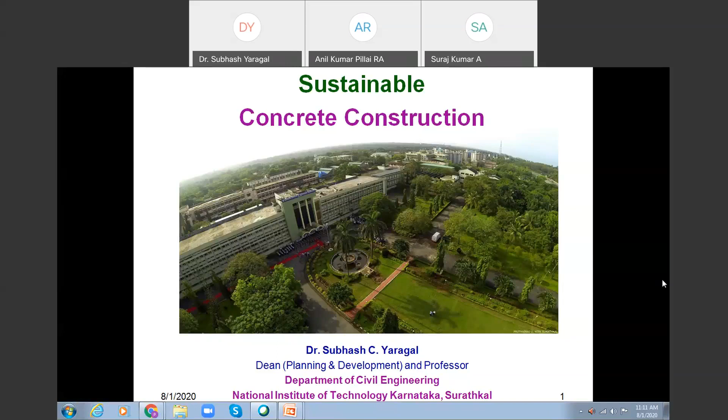There seems to be a problem with bandwidth. You can switch off your video if bandwidth is an issue. You can continue, Dr. Subhash Yaragal, sir. Can you hear us? Anil, sir, are you able to hear him? No, I'm not able to hear. Dr. Subhash Yaragal, sir, we are not able to hear you. Are you able to hear us? Yeah, now it's okay. The audio is muted. Okay, I have unmuted now. Is it fine? Yeah, now it's okay, sir. Okay, thank you so much.

We'll just get started with the most fascinating construction material all of us know today, and it has been exploited to its full extent, and that is concrete.

Let's go through why concrete has been so popular and advantageous to all of us. It is because of its high compressive strength, which is to its advantage. Concrete can be cast to any shape or size that the architect can dream of. It is the only material which can take the shape of the formwork, whatever we envisage or wish to have. Concrete also has the unique distinction that we can manufacture it on site, therefore it is going to be economical.

The invention of pre-stressing by Freyssinet dictated the need for producing high-strength concrete. Concrete, being a composite material with steel, has unlimited structural applications which we have been using all through. There is also the importance of lightweight concrete — today we can design and use lightweight concrete, which has a dual advantage: reduced density coupled with superior properties of thermal insulation.

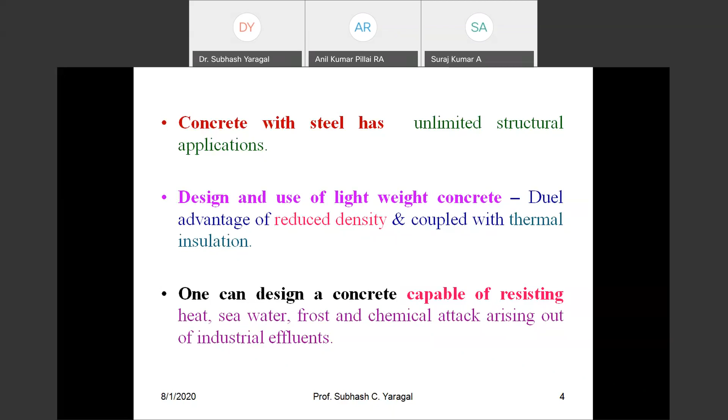To generalize, today we are in a position to design concrete capable of resisting heat, resisting seawater chemicals, resisting frost, and any chemical attack arising out of industrial effluents. As far as the demands of the nuclear age, we have used concrete for radiation shielding in nuclear reactors, and also in hospitals to contain nuclear fuel used for medication purposes to treat cancer, etc.

Concrete can also be sprayed onto and filled into fine cracks for repairs by the process of guniting. Today we can pump concrete, and it can be laid in difficult positions — we are all familiar with self-compacting concrete. So concrete is durable, fire resistant, and requires very little maintenance.

Now, this was the old school of thought. I would like to stress that today we cannot take it for granted that concrete requires very little maintenance, because we have been producing concrete with a lot of value-added industrial byproducts. I don't call these industrial byproducts waste products, because today we are using them to the best possible extent. So once we are introducing these industrial byproducts and producing different kinds of concrete, we cannot take it for granted that it is going to be durable. We have to ensure durability by periodic maintenance.

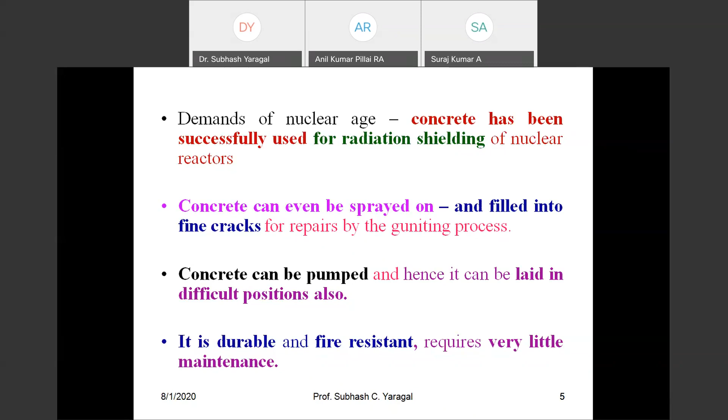Some other general remarks related to sustainability: we know concrete is the most consumed construction material today, only next to water — all of us know this. Undoubtedly, cement is going to be the costliest ingredient of concrete, and cement clinker production consumes a large amount of energy. So it is a very energy-intensive manufacture of cement, and it is also associated with the release of large amounts of carbon dioxide, which has a notable environmental effect.

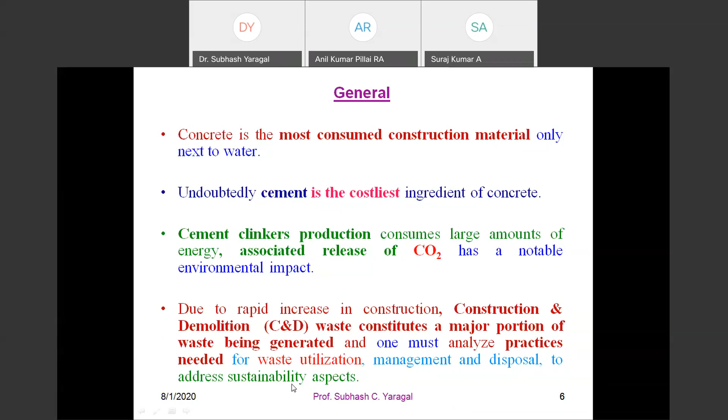We'll discuss about this. Further, due to the rapid increase in construction activities all over the world, the construction and demolition waste, what we call C&D waste, constitutes a major portion of waste that is being generated, and one must analyze practices needed for waste utilization, its management, and also its safe disposal to address the sustainability aspects.

No doubt, development has inflicted severe damage on the environment. We are not going to argue on this, and therefore it definitely is going to endanger its sustainability. So we have to strike a balance between development and sustaining ourselves in the years to come.

The exploitation of natural resources, particularly non-renewable resources for construction, has led to and is leading to millions of tons of construction and demolition waste. So it has been a challenge to handle this C&D waste. On average, every year we produce 15 billion tons of concrete throughout the world, which essentially means 2 tons of concrete per individual per year—not a small amount.

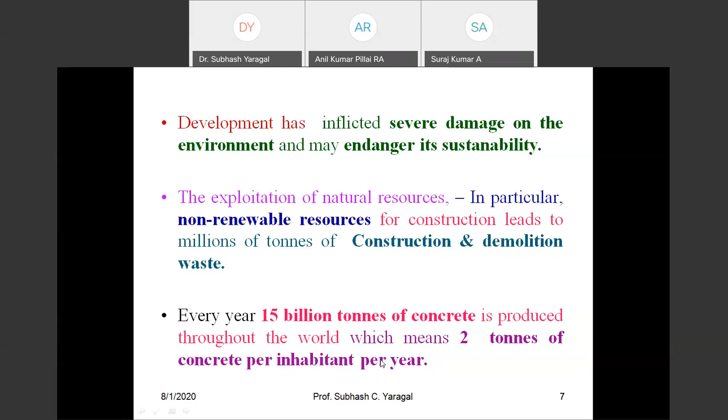The depleting natural resources in the current scenario demand research to examine viable alternative means, modes, and methods for sustainable construction. So any effort toward reduced cement consumption is laudable and a welcome move. We are advocating the use of supplementary cementitious materials, mostly siliceous or aluminous in nature, and this is being exploited with ongoing research.

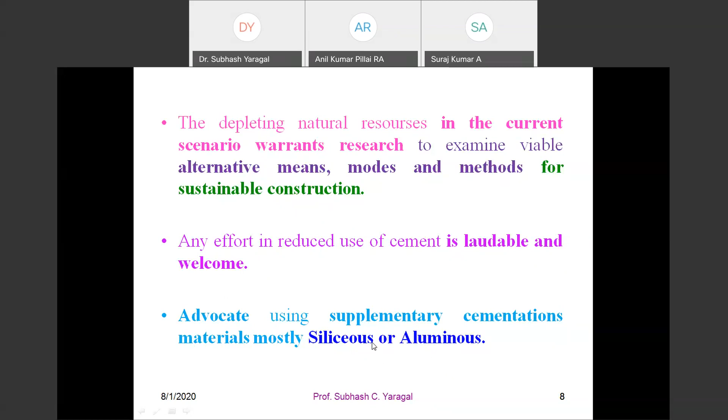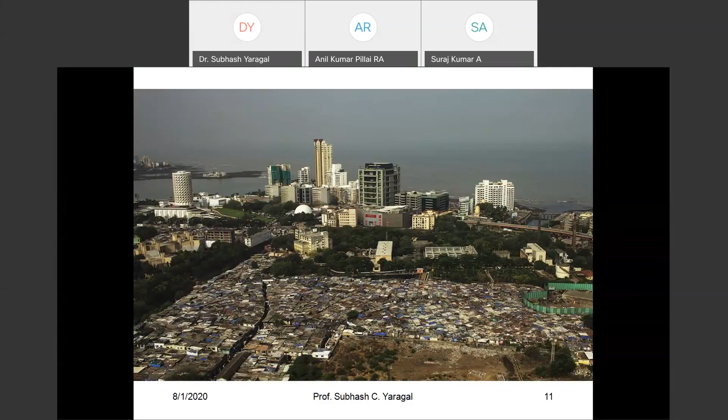Here's one more photograph from the same locality, showing the living conditions in the slum dwelling. You have wastewater simply let off, and a lot of materials that have been disposed of.

This close-up photograph has attracted my attention. This water is used for washing clothes, bathing, and even filtered for cooking and drinking purposes. In the background you can see even the pigs taking the same water. Definitely, this is not a livable condition.

So if you ask what sustainability or sustainable construction and development means, it is very simple. The father of the nation long ago said: live and let live. These two words carry a lot of meaning—you live comfortably, and you must also give room for others to live. That means whatever resources the present generation uses for comfortable living, you must also preserve or keep for future generations so they can live comfortably too. Essentially, sustainability is as simple as that.

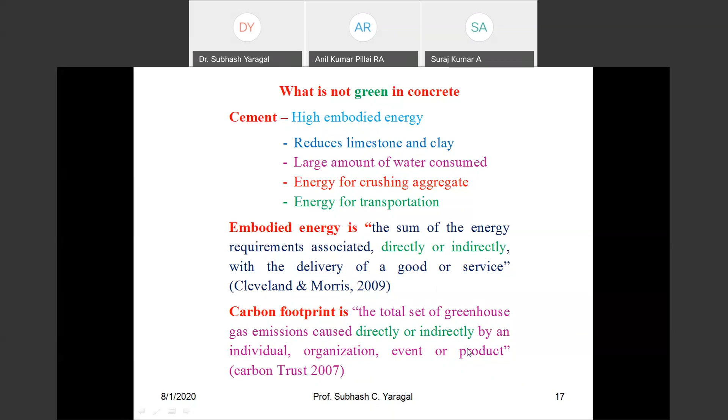Now we come back to issues of durability and look at the deterioration of concrete. If concrete is deteriorating, it has considerable detrimental impact on resources. The faster the deterioration, the sooner you are going to exhaust your available resources, so it is a cause of concern. This deterioration indirectly affects the environment and safety.

As regards to durability, I am talking about two items: the surplus lime and the carbonation. Surplus lime is due to high C3S, which is one of the hydration products of cement, directly associated with high fineness of cement. Today we are producing very fine cement, maybe because of the technology involved.

So more lime is released in the early days of cement hydration, which leads to leaching. That means calcium hydroxide would like to get out of the body of your concrete product. Once it is leached, it makes the body of concrete more porous. If your concrete becomes porous, it is more liable to chemical attacks, as chemicals can enter the body of concrete, threatening the design or life of your concrete.

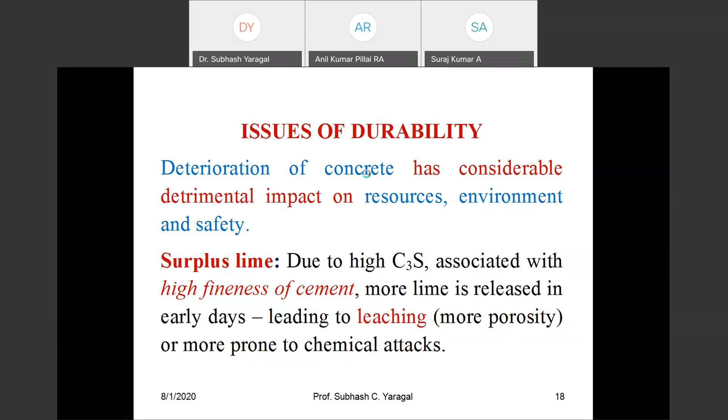Now the next one is heat of hydration. The heat of hydration is supposed to be rendered to the system when the system is in need. But due to fine grinding of cement, more heat is released in the early days of hydration, resulting in micro cracking and thermal shrinkage cracks. This is another important aspect.

Now the other factors are corrosion of reinforcement, carbonation, sulfate attack, and alkali silica reaction in concrete, which are the major issues of durability.

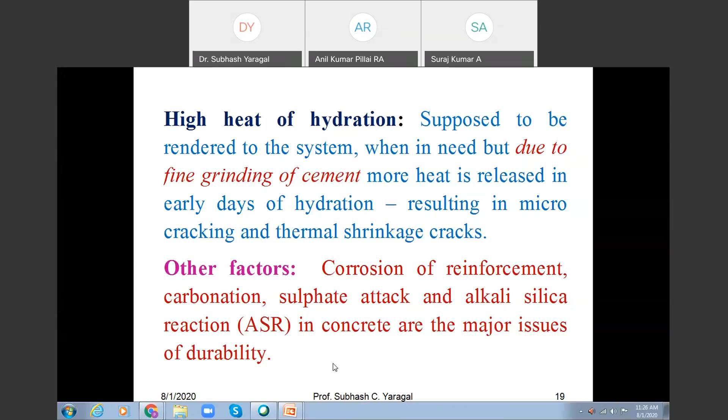Now, what is carbonation? It is the process by which carbon dioxide from the air penetrates into the concrete. It reacts with calcium hydroxide in the presence of water to form calcium carbonate, leading to minor shrinkage. This is one aspect of the problem.

In the presence of moisture, CO2 changes into dilute carbonic acid, which attacks concrete and reduces the pH, which is around 13, an alkaline environment, down to 8.3. So we are making the environment acidic, switching over from alkaline toward the acidic range.

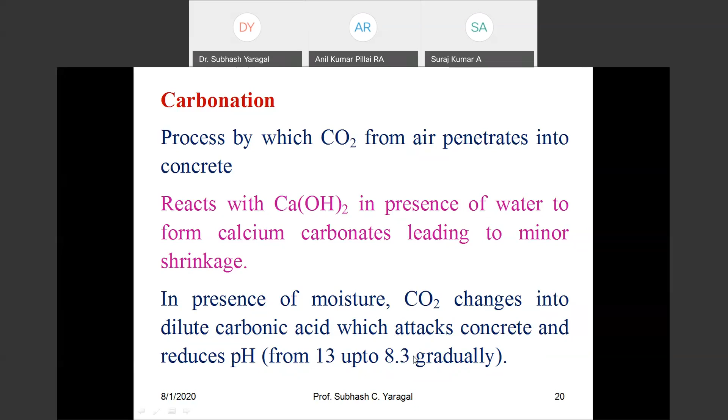Now, this is an advantage for us because a high pH creates a high alkaline passivating layer around the steel reinforcement, extending protection from corrosion. So the more the alkalinity, the more your reinforcement is protected. Now, what happens at a pH of 8.3?

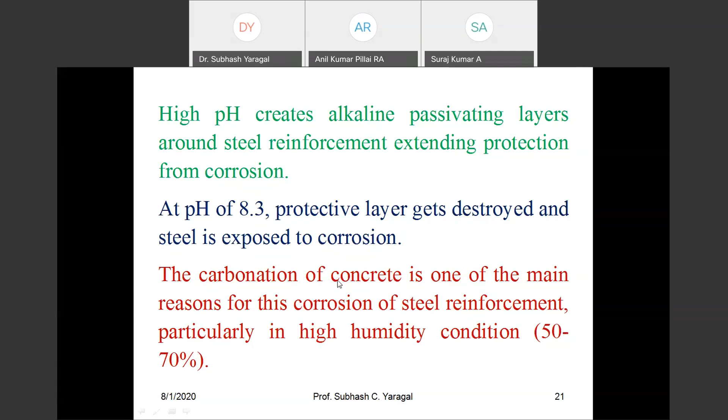The protective layers get destroyed and steel is exposed to corrosion. Carbonation of concrete is one of the major reasons for corrosion of steel reinforcement, particularly in high humidity conditions in coastal regions where humidity can range from 50 to 70%. Places like Mangalore have 90 plus humidity. In such cases, carbonation of concrete is a serious threat for the deterioration of concrete.

So I move to the issues related to this: what are the concerns for all of us, or the civil engineering fraternity, and what are the ways ahead to address this problem of sustainable concrete construction.

So if you ask, are there any global efforts towards sustainability? Definitely yes. The first attempt was in 2007, where we had the Intergovernmental Panel on Climate Change, IPCC. This panel stated that global warming is no longer an issue that has to be debated. That means there is global warming, and it is going to remain. We must have drastic actions for long-term sustainability.

Global warming is definitely due to human activity and is irreversible. IPCC came out with three important findings, and it recommends drastic steps to reduce CO2 emissions, which is the primary source of global warming. Further, it said if no actions are taken to curb or reduce CO2 emissions, it is likely that the Earth's average temperature could increase by 4 degrees C by the end of the century.

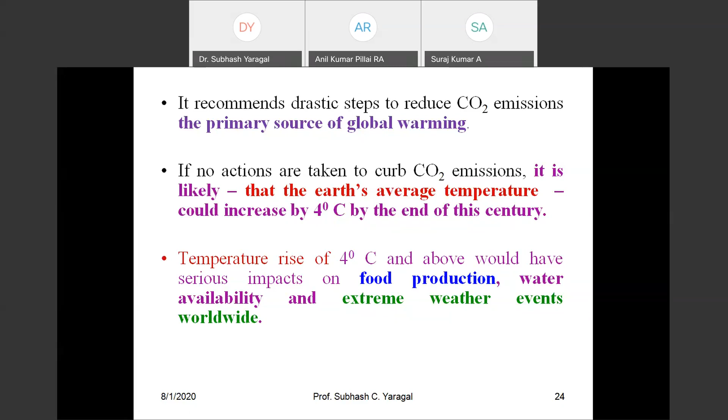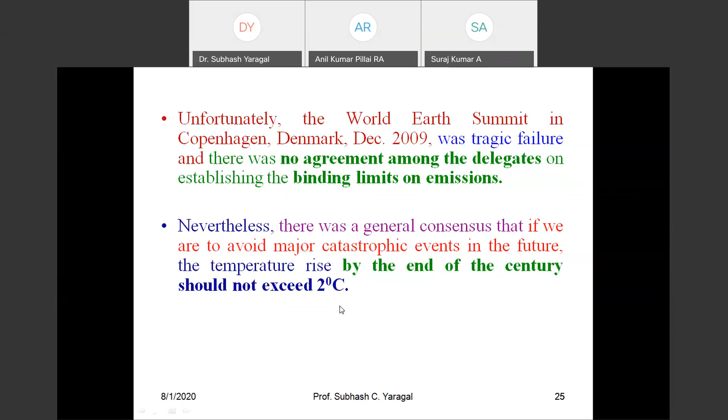The next global effort was the World Earth Summit, held in 2009, which was again a tragic failure because there was no agreement among the delegates on fixing or establishing binding limits on emissions. However, there was a general consensus that if we are to avoid major catastrophic events in the future, the temperature rise by the end of the century should not exceed 2 degrees C. I talked about 4 degrees C in the previous slide, but if we have to be safe, we should restrict the temperature rise to no more than 2 degrees C.

Now, storing this captured carbon dioxide underground probably is going to be a threat to the quality of groundwater, so research is on in this. Then you have seawater and CO2 - research is ongoing to use seawater to react with captured CO2 to develop aggregates and cementitious products.

The third one - there are efforts for converting atmospheric CO2 into commercial grade gasoline. The process involves converting CO2 into cost-efficient energy. Pilot studies are also going on.

The fourth one is actually due to nature - absorption of carbon dioxide that has been emitted, by the oceans all over. They have absorbed nearly half of the CO2 emissions during the past 2 centuries. This has been a blessing for all of us, because whatever carbon dioxide emitted, 50% of that has gone into the oceans. So this has served as a sink.

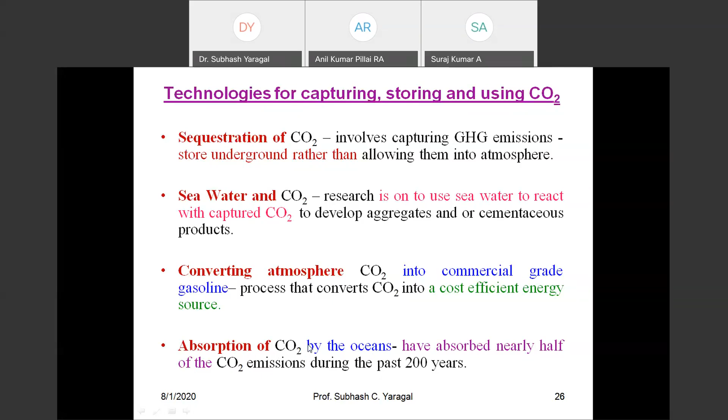Now, tropical deforestation is also a cause of concern - it's supposed to be the second biggest cause for global climate change, only next to burning of fossil fuels. Because of deforestation, Indonesia and Brazil rank 3rd and 4th in the world in greenhouse gas emissions. Of course, the first and second countries are China and USA.

Now, Tibet and global warming. Tibet's altitude is around 4 kilometers above mean sea level, and it is called the barometer of the world's climate, and is very sensitive to temperature changes. So if you look at what is happening in Tibet, you are almost directly correlating it to global warming.

If we see in the past 5 decades, from 1960 to 2010, every decade there has been an increase of 0.3 degrees. So 0.3 times 5 - in only about 50 years, you have a change of 1.5 degrees C. When you compare the temperature in Tibet, it is 6 times higher than other parts observed in China. So it is called the barometer of the world's climate.

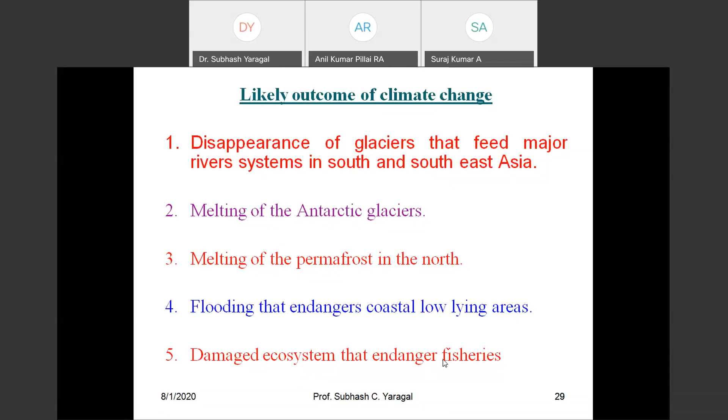You are likely to have danger of very serious air pollution because of global climate change. You may have increased danger of insect-borne diseases, increased threat of forest fires, and very serious floods. Forests turning to grasslands, very fertile land becoming barren land. And you may have extremely serious shortages of water both in Africa and Asia. We are already experiencing this.

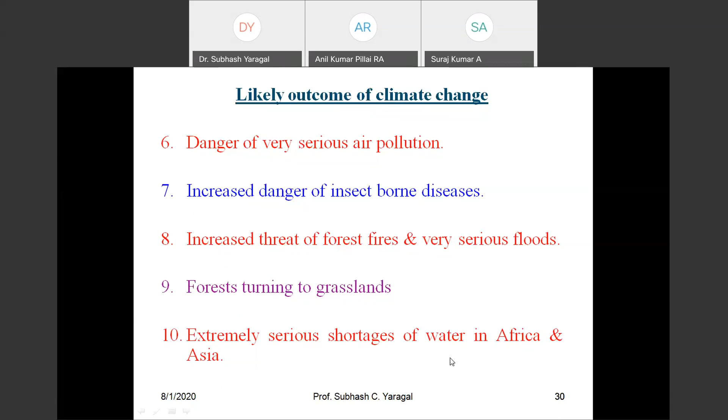So I'm coming back to sustainability. If you look at the production of cement, the carbon dioxide that we are emitting - if you produce 1 ton of cement, approximately 900 kgs or 0.9 ton of CO2 is emitted. Now, when you produce concrete products using cement, we may have absorption of CO2 from the atmosphere during the hardening process. Therefore, minus 0.4 ton, around 400 kgs, goes back into the body of concrete. So effectively, if you are producing 1 ton of cement, you are letting off around 500 kgs of carbon dioxide into the atmosphere.

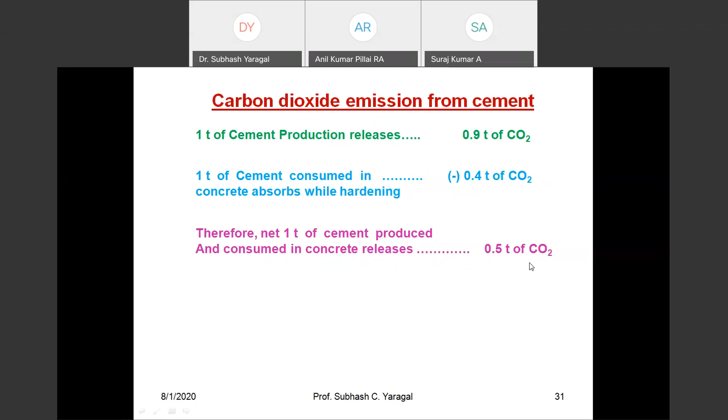So let's look at the greenhouse gases from manufacture of OPC. Mostly we think of carbon dioxide, but greenhouse gas emissions include other things I would like to highlight here. Manufacture of OPC is highly energy intensive and a significant contributor of greenhouse gas emissions - enormous emission of CO2 into the atmosphere, along with minor amounts of oxides of nitrogen and also methane. Now, oxides of nitrogen and methane, however small they are, are much more damaging than carbon dioxide.

Just to give you a feel, I have given you the relative damage indices for various greenhouse gas emissions. If you take the damage of carbon dioxide as 1, methane is 20 times more threatening or more dangerous. Nitrous oxide is 200 times more dangerous, and fluorine is 15,000 times more deadly or dangerous than carbon dioxide.

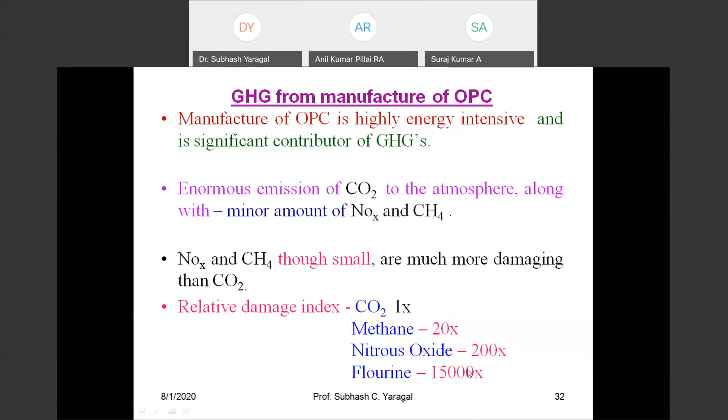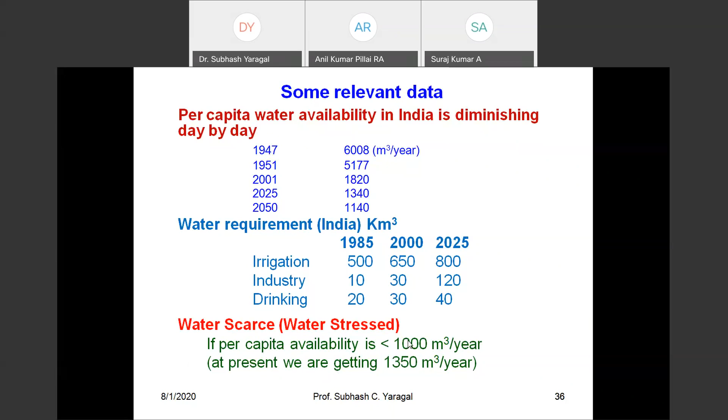So currently we have this availability. Very soon, a lot of areas all over the world will be having water scarcity or they will be water stressed.

So what do we do for sustainable development? Several important issues: loss of storage due to silting. So simply, you do the desilting, you make your reservoirs or places impounding water so that water gets stored, not silt. Address the problem of declining groundwater table. You do the recharge, so that the groundwater table stabilizes, but it is always depleting now.

We need to scientifically address the occurrence of droughts and floods. The degradation of water quality is also happening; this has to be scientifically looked at. Coastal areas have the problem of saltwater intrusion, and it has to be addressed. Waterlogging in low-lying areas has to be addressed. Address the problem of proper drainage, and you have to preserve the soil nutrients by proper drainage.

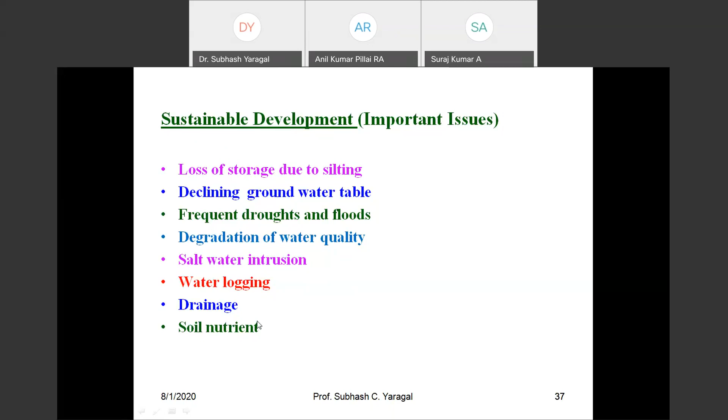Other familiar techniques for preserving water, which is a source, as I say, for production of cement, for making concrete. Therefore, I'm talking about water here.

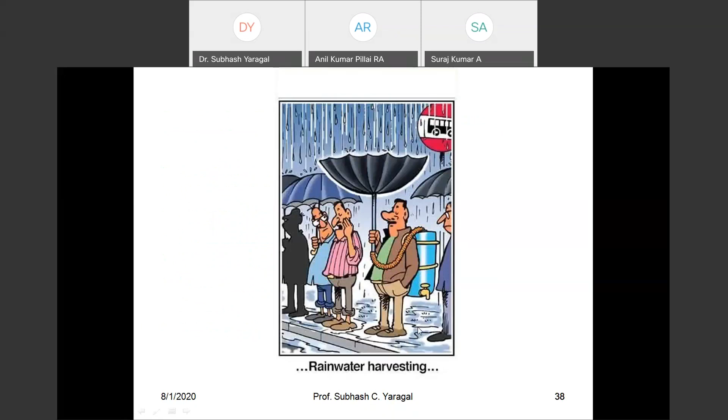So rainwater harvesting is a very simple technique we must preach and practice. You must encourage rooftop rainwater harvesting. I think government has to have a policy now for whatever new construction. So places like Chennai already have policies where every new house construction must have the provision for rainwater harvesting. So we are preserving water as a resource.

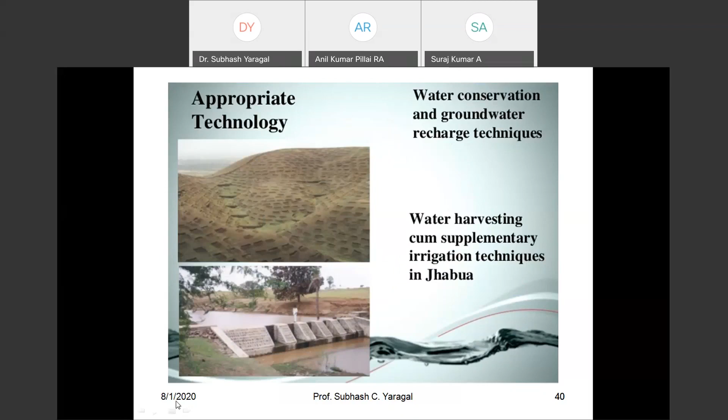We have several other technologies for water conservation and groundwater recharge techniques. They are to be encouraged and practiced. You may have storage devices either above or below ground: storage tanks, water containers, lagoons, infiltration ponds. All of them have to be encouraged.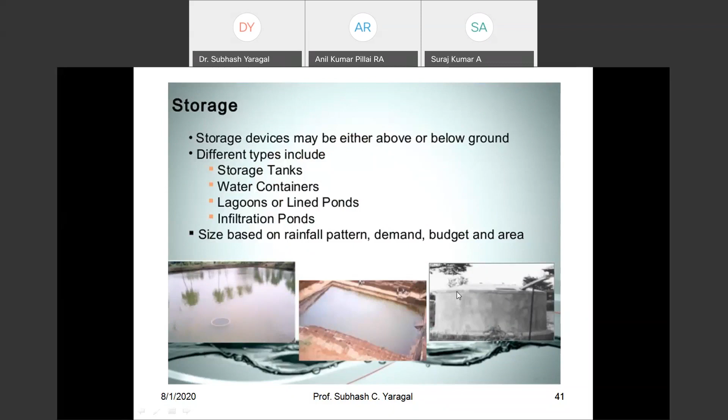And I would like to say water is very precious. We must save it for the future. So there are a lot of quick tips, but I'm not going into the detail in the interest of time for all of us.

Every day there are many simple little things we can do around your house to save water. If we save water, you save money. And if we save water and money, you help the environment. So all of them start and end with you. You are an important stakeholder if water has to be preserved.

So adopt some clever shortcuts to save water. All of us are familiar with a lot of shortcuts. How to have a morning shave? Use a mug of water. How to brush? Don't use your running tap, but use a mug of water. So a lot of such quick tips are available and have to be practiced if water has to be preserved as a very important commodity.

What are remedial measures as far as water is concerned? Conjunctive use of surface water and groundwater. We must have a policy on how much surface water has to be used and how much groundwater has to be pumped. That means you must have an effective draft operation policy. You cannot go on exploiting groundwater available to your whim and fancy. Government should intervene and decide how much groundwater draft is being utilized from time to time.

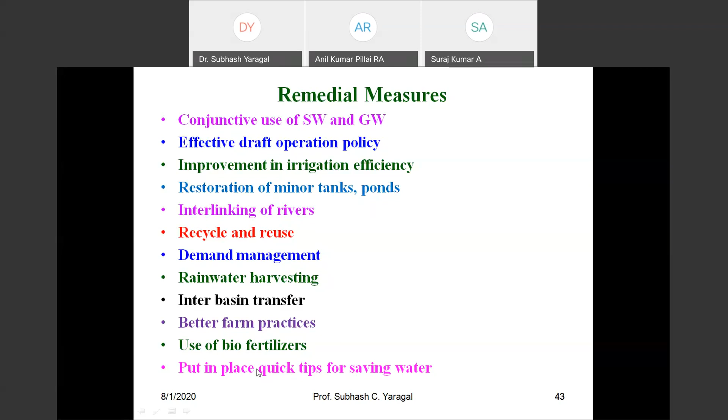So there are now several hotels which supply water only if you demand it; otherwise they do not serve it. If four of you go for a coffee, four glasses of water are not kept on the table. Only if you ask, they serve you water. So it is a very good step for saving water.

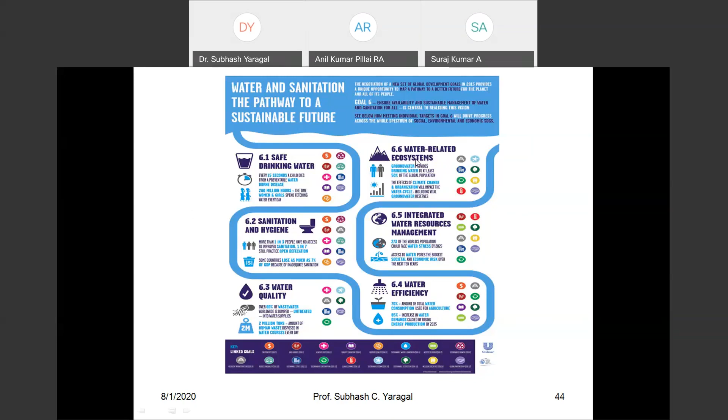I just shared one slide on this. What is the way ahead? I am moving further, and mostly I would like to share the research efforts on in NITK Surathkal, which will be my last part. So what are our ways ahead to address this problem of concrete sustainability?

To our advantage, we have a lot of industrial byproducts. I have given very few examples, but there are so many: waste foundry sand, copper slag, ferrochrome slag. We have ferrochrome ash also, which we have used, palm oil clinker, coconut shell, bottom ash, blast furnace slag, imperial smelting slag, steel slag, and fly ash—both C and F class.

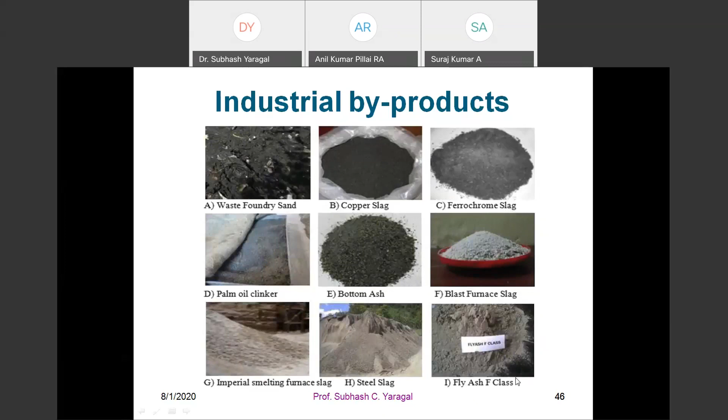So let's see how we can make concrete go greener. We are talking about eco-friendly materials, green concrete, sustainable concrete. So how to make concrete go greener? First, we must reduce the content of OPC per cubic meter of concrete production.

Try to reuse previously used concrete elements if they are good enough—we must not simply throw them as debris, but try to reuse them. Reduce or use water sparingly; take water for making concrete only to the extent really required, treating it as a very important resource. Of course, we have admixtures to supplement or reduce the consumption of water.

So you must recycle—use recycled coarse aggregate and fine aggregate from your construction and demolition waste. I'll be reporting a lot of studies we have done, and you will appreciate the efforts that have gone in at NITK Surathkal on this. If possible, even try to recycle your rebar leftovers. Use the right admixtures, right aggregates, right reinforcement—that means you make a good concrete, and a good concrete is more durable.

So integrate concrete into green building elements. Go for aerated autoclaved concrete in the building.

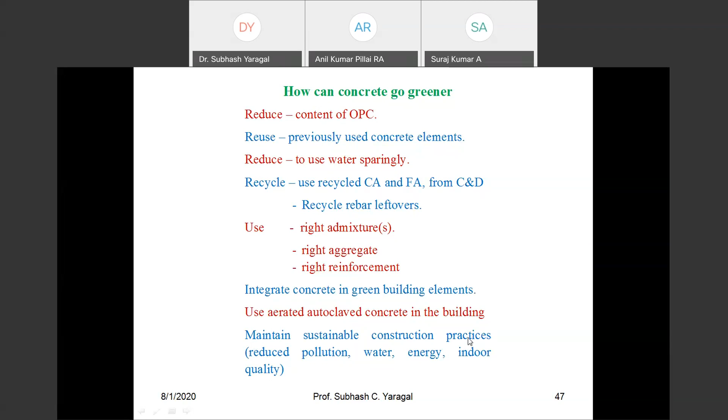We come to, of course, blended cements. Anil Kumar Pillai also talked about blended cements. We have exploited this to the extent possible. So Portland Pozzolana cement is being used extensively, which is a welcome sign because we are using fly ash. Portland slag cement - a lot of slag also we are using. We are producing both PPC and PSC.

Now I'd like to draw your attention to composite cement, which has been recommended by the Bureau of Indian Standards. It is an intimately interground mixture of OPC clinker along with slag and fly ash. You use your limestone or clay clinker to the extent of either the lower or upper limit, so you still preserve around 35% of your deposits. But you use fly ash 15 to 35%, and granulated slag, ground granulated slag, 20 to 50%. So this composite cement, which is a blend of fly ash and GGBS, is supposed to be more durable and is also recommended by the Bureau of Indian Standards.

So all these three are a welcome note for reducing the manufacture of OPC. You have found a substitute to the extent possible, and this has to be encouraged in the years to come.

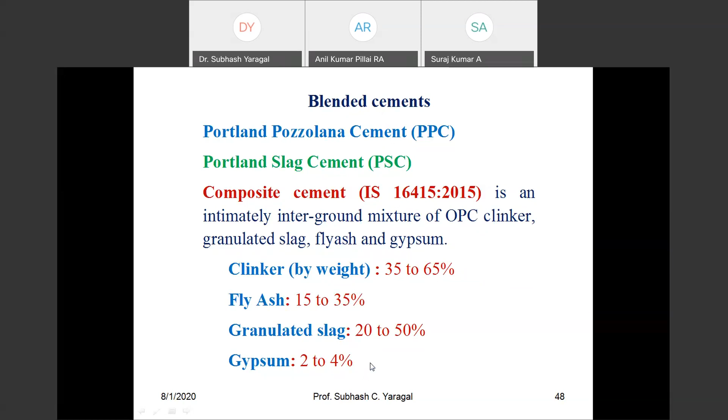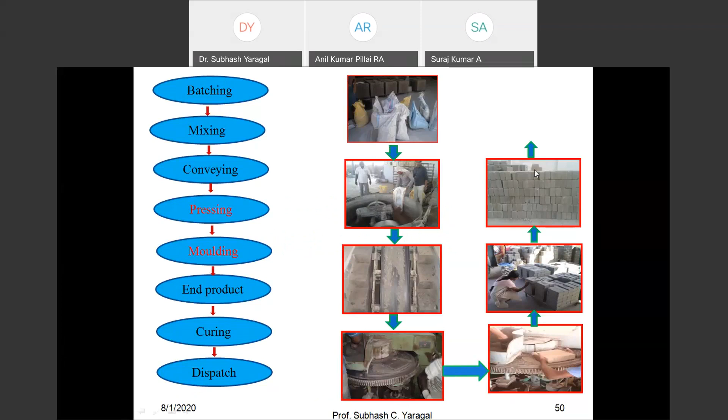So, of course, coal ash bricks have been commercially popularized - that is a welcome note. A lot of people are producing coal ash bricks, and you also have bottom ash, which is used as fine aggregate - also a welcome note. In production of coal ash bricks, you have batching and mixing, then you convey it, do the pressing and molding, get the end product, do the curing, and then dispatch or transport them. We also have concrete products.

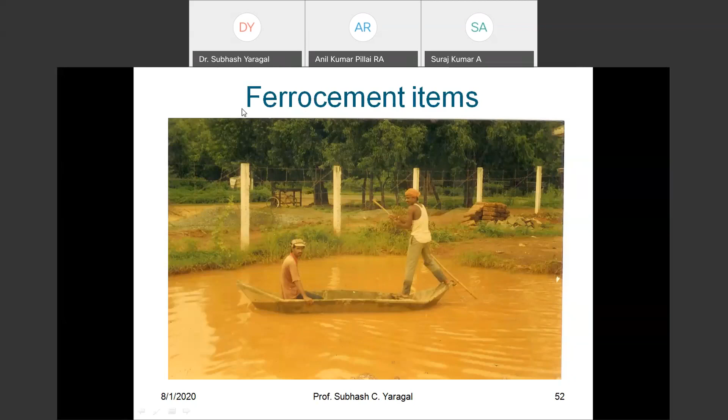So wherever you think there is scope for manufacture of ferrocement items, I think in the years to come, ferrocement products should be exploited. They are underutilized, in my opinion.

So I'm coming to some selected research efforts at NITK Surathkal, which is the last part of my presentation. Please pay attention, those who are already doing research and those who want some takeaway from our research which has happened and which has already been published.

The first work I'm sharing here is the characterization and performance of processed lateritic fine aggregates in cement mortars and concretes. In this study, we have taken the lateritic sand which is available in laterite deposits during the time of dressing of laterite blocks, and we have come out with a systematic way of characterizing this lateritic fine aggregate. We have studied its performance in production of cement mortars and concretes.

If you go for any level of replacement of lateritic fine aggregate as a substitute for river sand, you can do it up to 100% replacement - that is what we are reporting here. For any concrete, you can straight away use the lateritic fine aggregates characterized the way we have done, and you get the same or more strength than you would have got using river sand.

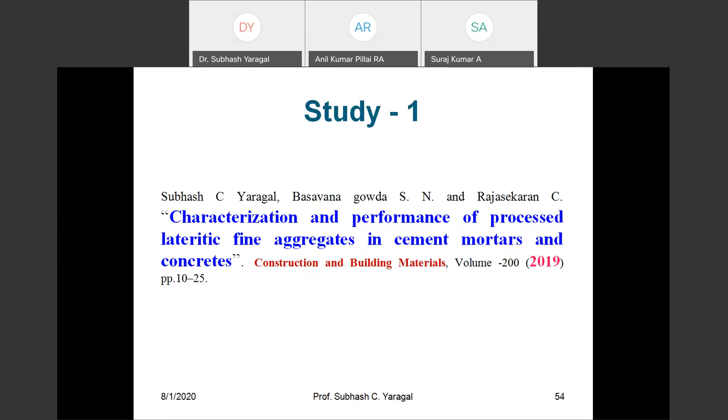You have lateritic soil deposits. During making your laterite blocks, you have a lot of wastage material. As per IS 383, you have 4 zones of sand. Zone 1 is very coarse sand and zone 4 is very fine sand. For various sizes, you have the lower class interval and upper class interval, percentage finer, given by this code. For making our lateritic fine aggregate, we have taken the average of the class interval.

So if I have to produce zone 1 sand, I'm looking at these percentage finer passing various sizes. If I want zone 2, I'm taking these, zone 3 and zone 4. So we have produced all 4 zones of lateritic sand, and we have also characterized them, and studied the performance in both mortar and concrete.

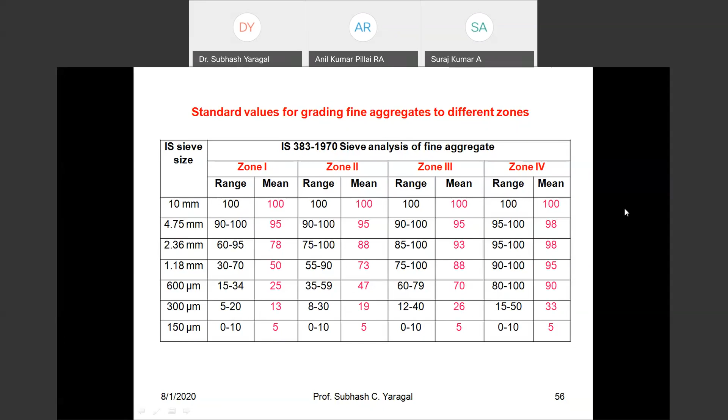So how have we done the processing and characterization of lateritic fine aggregates? From here, we have picked up the debris or broken fragments of lateritic soil. We have passed it through a jaw crusher in the lab. We have got this material. From here we have taken the product, which is washed with wastewater on a 150 micron sieve, and you get a product.

You do the sun drying. After sun drying, we have stacked them in various cylinders here. This is probably passing 4.75 retained on 2.36. This is passing 2.36 mm size but retained on 1.18 sieve, that way. And you can produce any zone of sand, and then we have used it in making mortar and concrete.

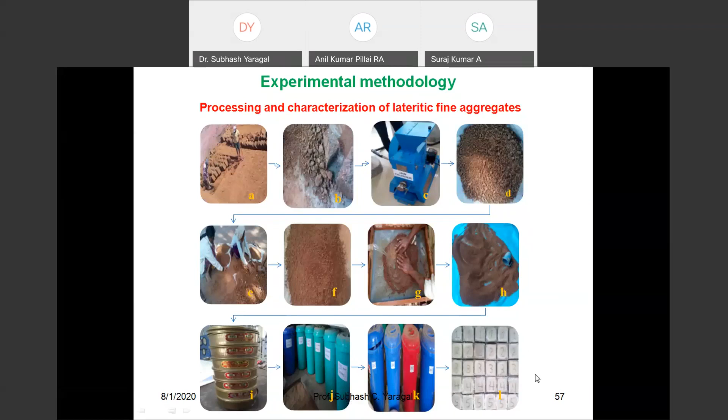So if you look at the different gradation fractions, for your unprocessed laterite, this is for river sand, various sizes or fractions. Unprocessed lateritic sand will look like this, and processed laterite will look like this.

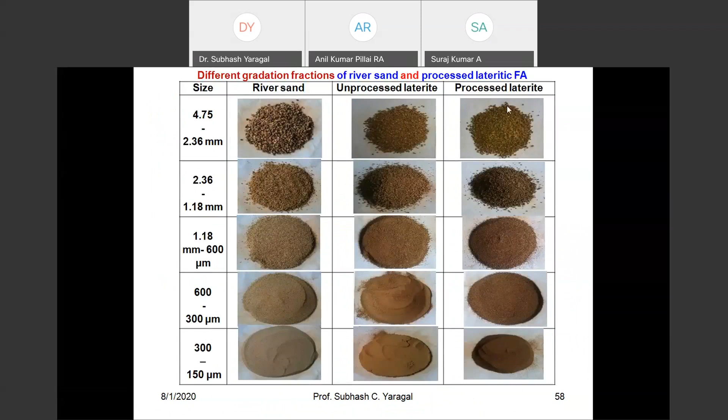So first we have studied laterized mortar, where we have gone for no replacement, everything is river sand. We have gone for full replacement, everything is lateritic sand, characterized lateritic sand. This is, in absolute value, the compressive strength that we have got for various 4 zones of sand.

Don't look at this, we'll look at this - this is the normalized compressive strength. So here is my attention: if you are looking at zone 3 and zone 4 sand, at 25% replacement, they are far superior than what you have got for the river sand. So straight away, if you are using laterized mortars, you can use zone 3 and zone 4.

There is only plus or minus 2%, which may be due to experimental error. So zone 3 and zone 4 sand, which is characterized, you can use lateritic sand to the extent of 100% without compromising on the strength of your mortar.

What happens to zone 1 and zone 2? Very coarse, little coarse - so you lose around 10 to 15%, okay, 10 to 12% of the strength when you look at 100% here. This is strength due to river sand.

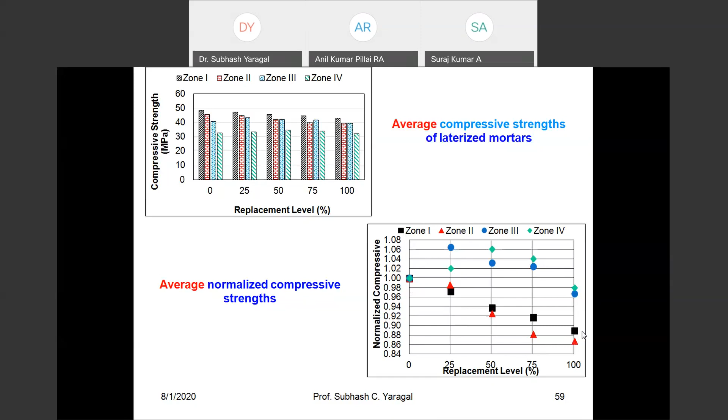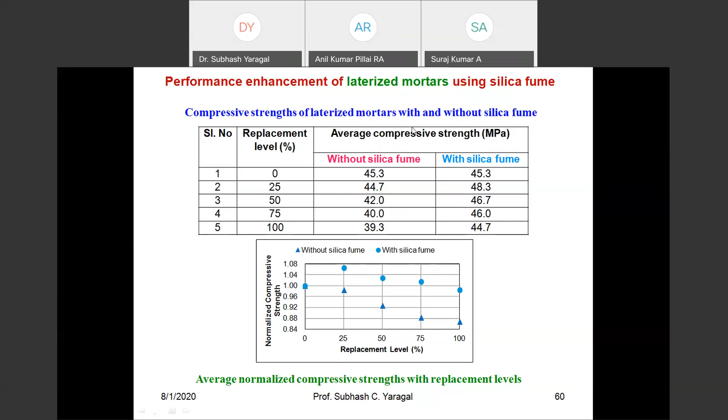Now here we have gone for replacing 5 to 10% of your OPC in concrete by silica fume. So 90 to 95% is your OPC. Remaining is replaced by silica fume, which is a superior material, and we have enhanced the performance of your zone 1 and zone 2, and you can use 100% replacement by that. So all 4 zones, whatever is made or available due to your lateritic soil, can be used without having any fear for making laterized mortars.

So in study 2, we have tried to use, or we have looked at the scope for using recycled aggregates in both mortar and concrete.

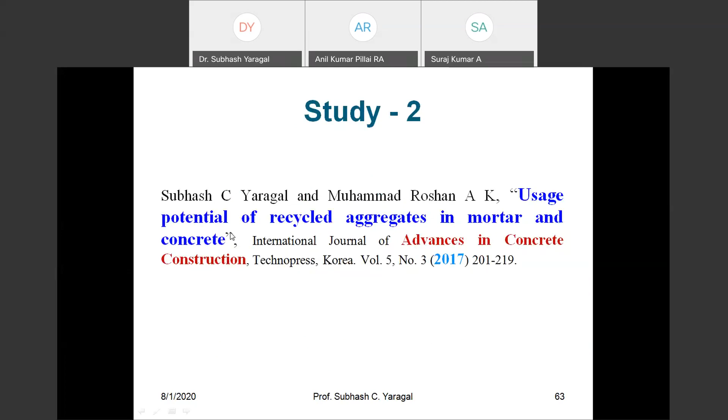So you have the natural coarse aggregate, and you have the recycled coarse aggregate.

Suraj, hello, Suraj? Suraj is not there. I think... Anil, can I take another 15 minutes? There is no problem. No problem, no issues, you can take your time. Yes, I have around another 20 slides, but everything is going to be fine. You can take your time. Yeah, because it is very useful, you can take your time. No issues, thank you, Anil.

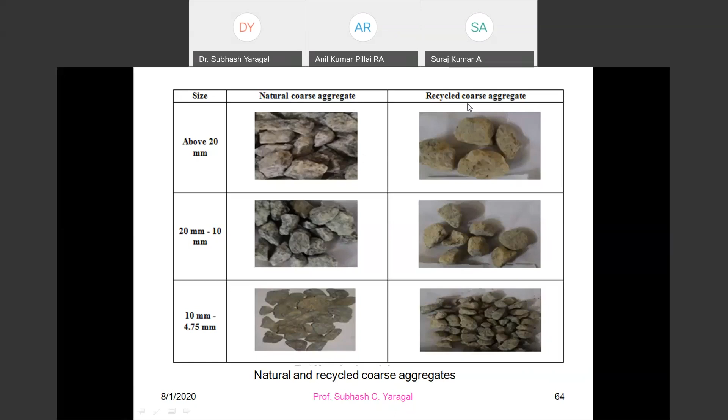So in this study, we have tried to go for replacing virgin or natural coarse aggregate by recycled coarse aggregate that we have taken from construction and demolition waste. We have tried to do the processing, and river sand also we have replaced by copper slag, which is again a value added product. We have also done the replacement of river sand by iron ore tailing, and we have used recycled coarse aggregate. So this study is very important where both the fine aggregate has been replaced to the extent possible by copper slag or by iron ore tailing, and instead of the virgin coarse aggregate, we have used the recycled coarse aggregate.

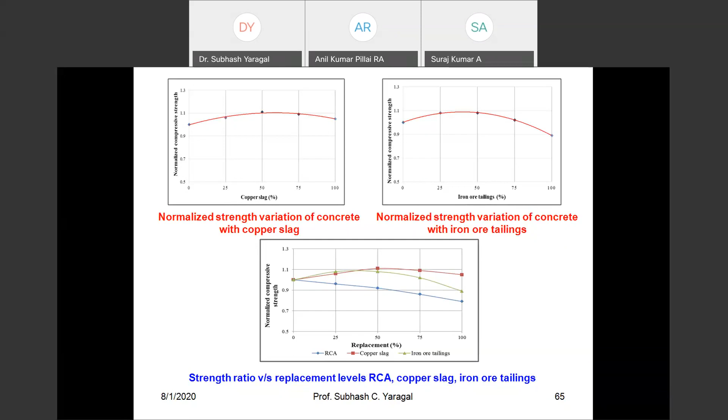So what we have done is, if there is no replacement, 100% virgin, you have the strength here. We have written normalized compressive strength. If we go for 25% replacement of virgin coarse aggregate by recycled coarse aggregate, you lose strength. If you do 50%, further loss, and if everything is recycled coarse aggregate, you usually lose about 20 to 25% strength in concrete.

Now, what we have done in this effort is I am reporting the compressive strength results for cement slurry treated RCA. So we have taken around 5% of cement slurry, and whatever recycled aggregates are kept immersed in this cement slurry for 1 day, they are sun dried and then used in making concrete.

So if you do that, your control strength is here. For 25%, we have got 12% more than what is for the control mix. So these RCA, recycled coarse aggregates, have been treated with cement slurry, so whatever is your replacement, you have strengths more than what is for your virgin aggregate. So you can definitely go for full replacement of your virgin coarse aggregate by recycled coarse aggregate if you are treating your RCA for about 24 hours with 5 to 10% of cement slurry. You lose around 5 to 10%, but you get the efficient aggregate so that you get strength equal to what is for the normal concrete.

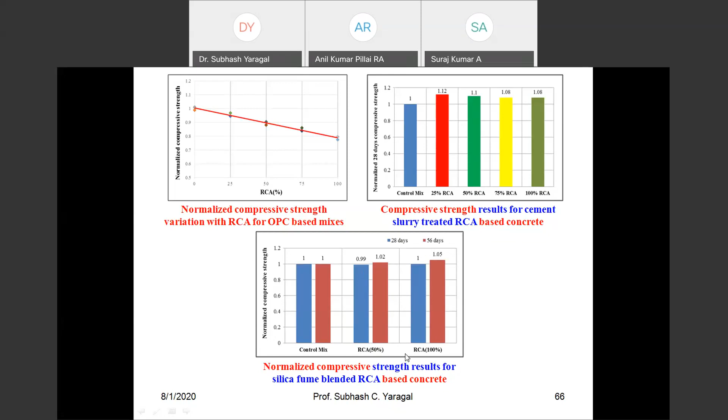Now, the next study we have done is the strength for fly ash blended RCA based concrete. So part of the OPC is replaced by fly ash, so you have a blended cement kind of replacement to OPC, and you are using RCA. Here, replacement to OPC and you are using RCA. In this case, we are doing even replacement to fine aggregate.

Now, what we have done: for river sand, you have the strength here. We have used recycled fine aggregate along with river sand. Why have we done this hybrid approach? The recycled fine aggregate, which is taken from construction and demolition waste, has the problem of water absorption. So anything less than 300 micron, that is 300 micron and 150 micron, has the problem, or behaves like clay, and therefore we got rid of those two fractions. So this recycled fine aggregate does not have the 150 and 300 micron size; those are replaced by river sand. I'm saving the other fractions here.

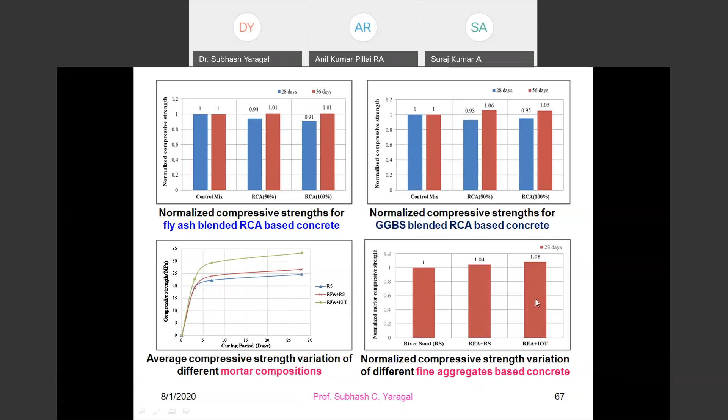Similarly, I'm using IOT. So this is your recycled fine aggregate component and iron ore tailings, which is again an industrial byproduct. Both of them are superior to river sand. So we use this fine aggregate also and have shown that you get 4 to 8% more strength as a replacement to fine aggregate, river sand.

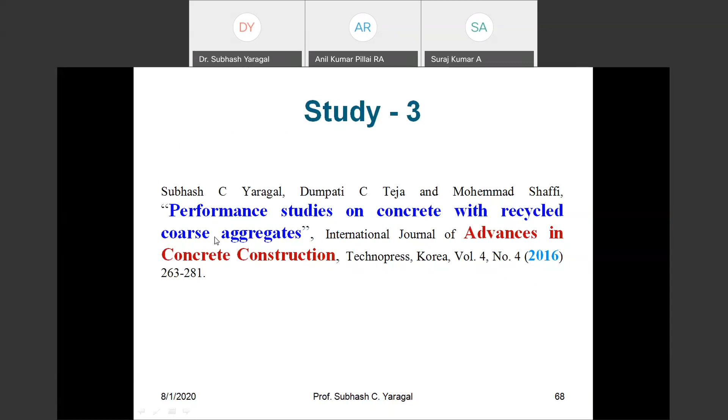So, study 3: performance studies on concrete with recycled coarse aggregate. In this study, it is for the processing, how we are processing the recycled coarse aggregate.

So for the first time, we have used a rod mill to do the processing. Rod mills are used by mining engineers. This cylinder has small steel rods which are used to beat the mineral ore. When they want to process the mineral ore, they use this rod mill, which has the mineral ore beaten by small steel rods.

So we thought, why not use this rod mill to process the recycled coarse aggregate from construction and demolition waste. This study is very interesting. We have optimized 3 parameters in this study. Now, how do we say the recycled aggregate processing is good? That is based on a simple test, 24 hour water absorption test on the processed coarse aggregate.

First we have done water absorption for various weights of construction and demolition waste. Now, what is charge? This charge is your steel rod weight. We have taken 840 grams. So if we take the C and D waste equal to the charge weight, or 2 times, 3 times, 4, 5 times the charge, we have studied the water absorption for all of these, and it is very interesting to see. If you take the C and D waste around 5 kg to the charge of steel rods at 840 grams, you have the least water absorption. That means this coarse aggregate is processed best compared to the remaining. So I have optimized for each run how much kg of C and D waste can be taken.

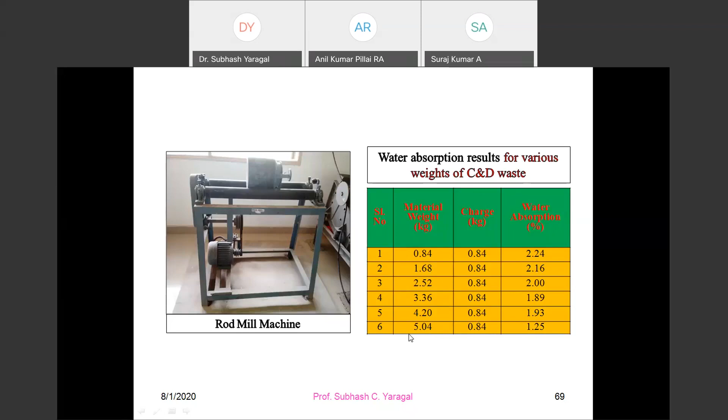Next, water absorption results for different types of charges. We have tried, as reported, only rods, with the charge weight about this. Conventionally people have used steel balls, like in the ordinary Los Angeles machine in the lab. They have used steel balls; we have used a combination. Our study showed that using a rod mill, you get the best processing here. Charge A is the ball mill, and A plus B is both the ball mill and rod mill. So we have optimized the rods as better.

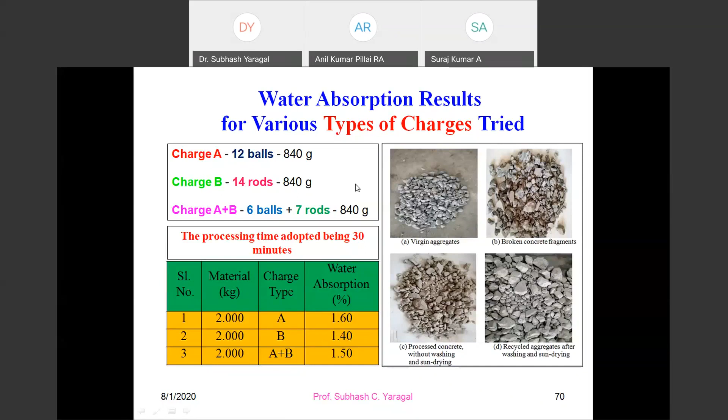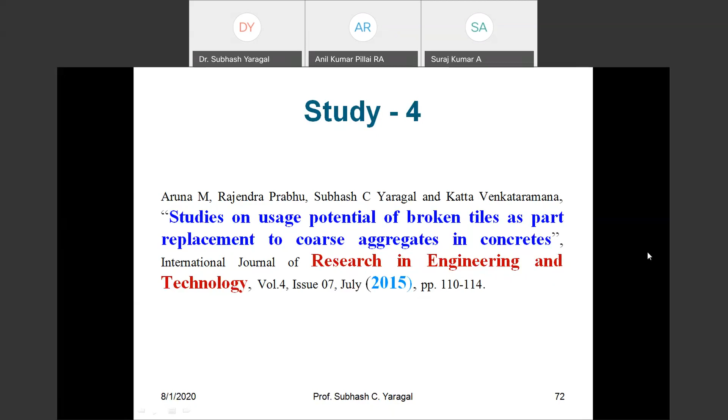The next study I am reporting is on the usage potential of broken tiles as a part replacement to coarse aggregates in concrete. Mangalore tiles are extensively used as roofing material, and these are broken during transportation and periodic maintenance of tiled roofs. When we replace these, we get a lot of tile waste products. So for the first time, we have done a systematic study where this tile waste has been used as a coarse aggregate in concrete, as a fine aggregate, and also as a secondary cementitious material substitute to OPC in concrete. So all three we have done.

Apart from using broken Mangalore tiles as coarse aggregate, fine aggregate, and secondary cementitious material, we have also done a lot of work on using recycled plastic waste. I'll show you. We do the melt processing of domestic plastic waste, which is thrown or abused. We use the plastic and prepare pellets out of this melt processed plastic, and use it as a filler, maybe 10 to 15% replacement to river sand, in concrete and mortar. You can also make fibers out of this MPP for use in concrete. We have also done studies on EPS products, using thermocol or packaging material as coarse aggregate in concrete, both normal and pervious concrete, and also in mortar.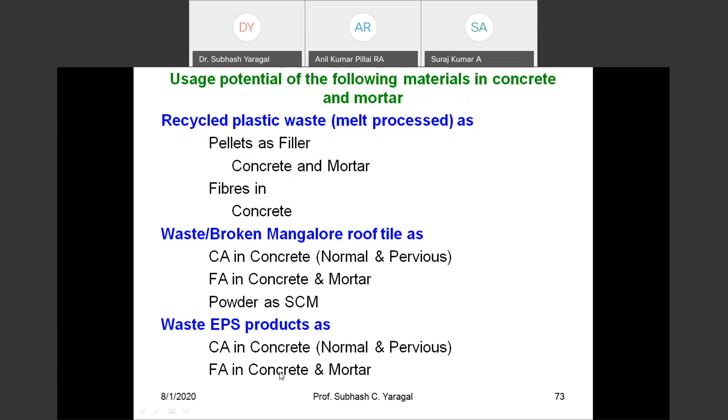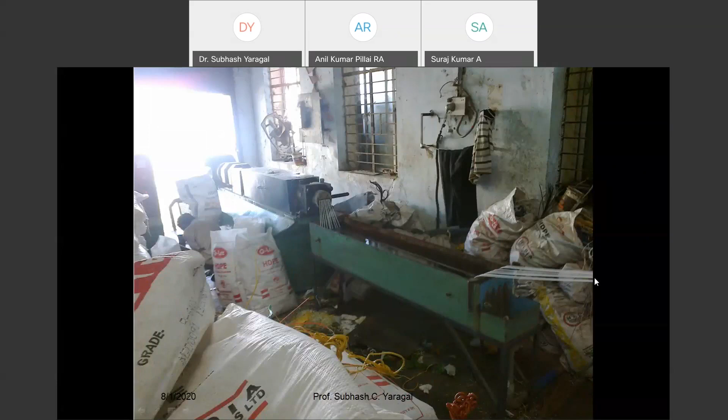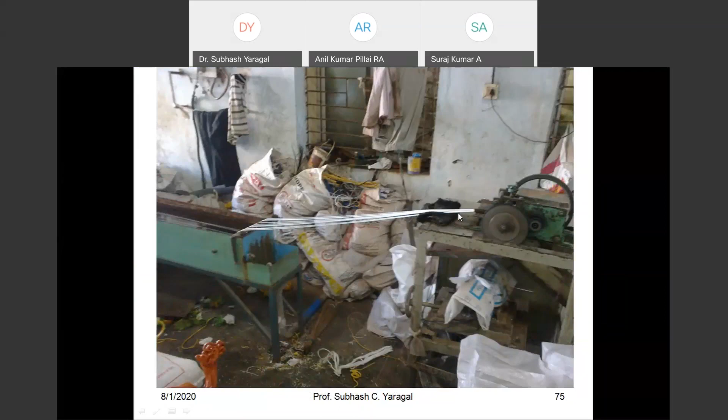This is a melt processing plant in Baikampadi, Mangalore. This chamber is a heat chamber where all the domestic plastic bags are put and melted. The melted plastic is extruded from here, and allowed to flow in a water bath, giving cooled strands of melt processed plastic. From the water bath, we use a pelletizing or cutting machine, and these strands are cut into small pieces, which I'm calling pellets. These pellets are filled into bags, and it looks like this.

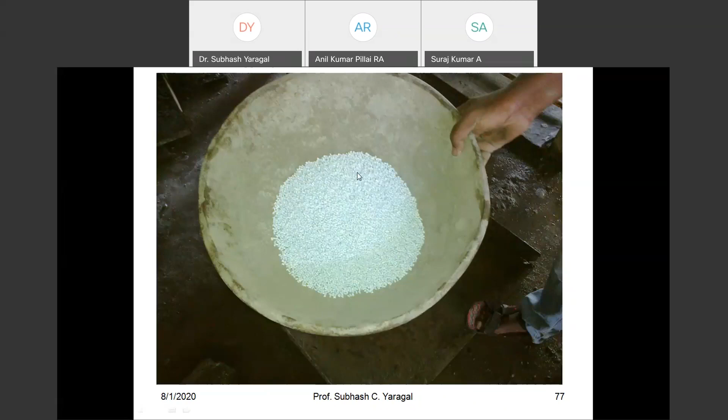You can bury these pellets at about 10 to 15% without compromising much on quality. Even if the strength comes down, you can identify where these lightweight concrete products can be used for non-structural applications. So that way, we have shown that even plastic pellets can be buried scientifically in some products.

So we can use these MPP fibers of different aspect ratios in increasing the flexural strength of concrete.

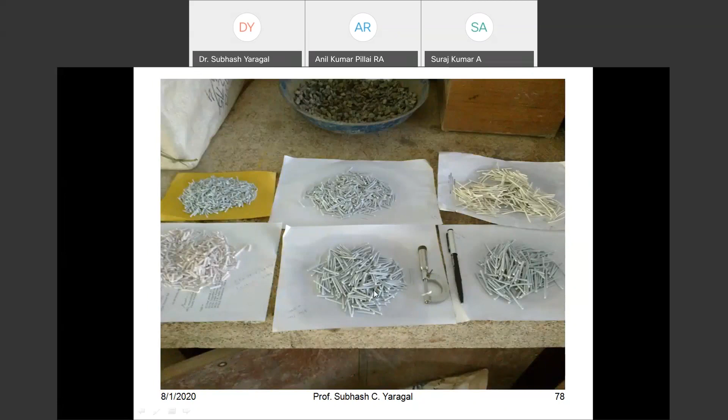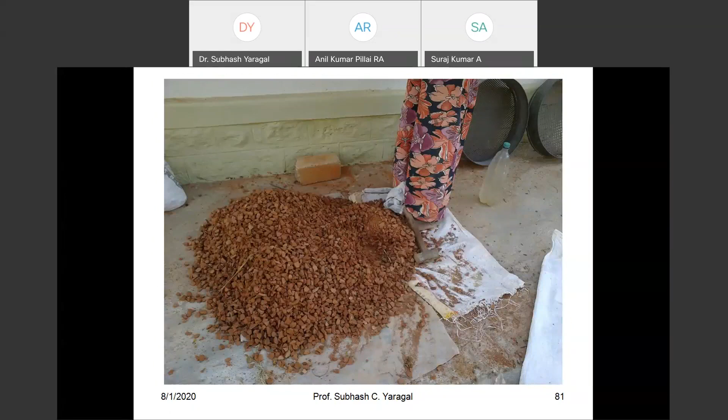Next, the tile industry. We have a lot of tile waste, so we can make coarse aggregate, which we have used successfully in making concrete. It looks good because it is a ceramic material with very superior quality soil which is burnt, so it has got very good strength. We have used this as a supplementary cementitious material in concrete.

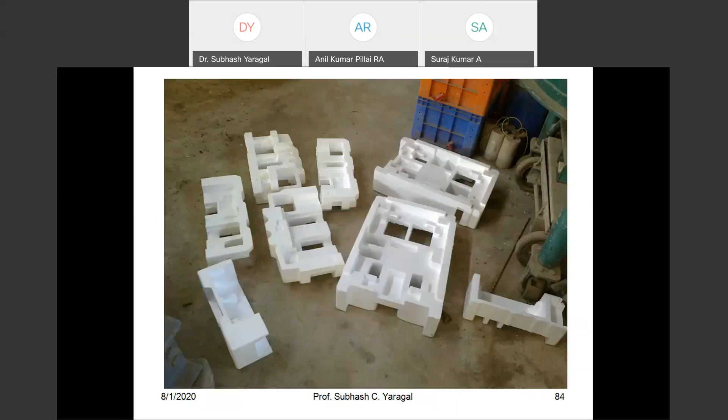Then we have used thermocol, or the packaging EPS material, shredded and cut into coarse aggregates of different sizes.

Now, development of new resource-saving systems and increased recycling and recovery of waste materials. We have attempted this to reduce the environmental impact of concrete so as to address sustainability. So melt-processed plastic pellets utilization as filler in concrete is very promising. It is a means to manage non-biodegradable waste.

Broken Mangalore tile, being a ceramic material, possesses good heat-resisting properties, and when incorporated in concrete and mortar, is definitely going to perform better in the event of accidental fires.

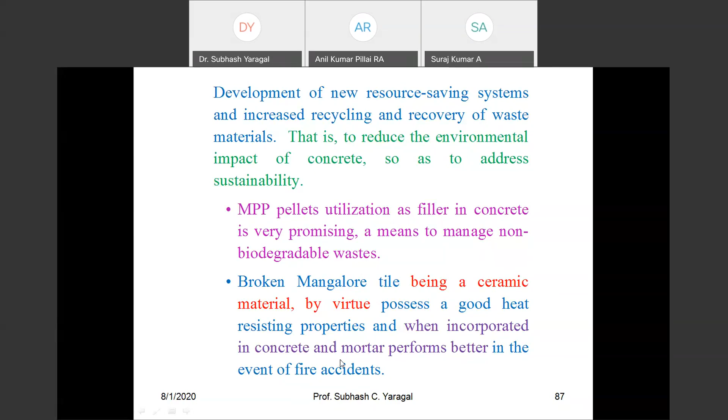Again, broken Mangalore tile, being a burnt clay product, possesses pozzolanic properties which can be utilized when finely ground and blended with cement.

The results from EPS-based concrete and mortar suggest that there is scope for non-structural applications like lightweight bricks, rooftop applications, and also serves as a solution for EPS disposal.

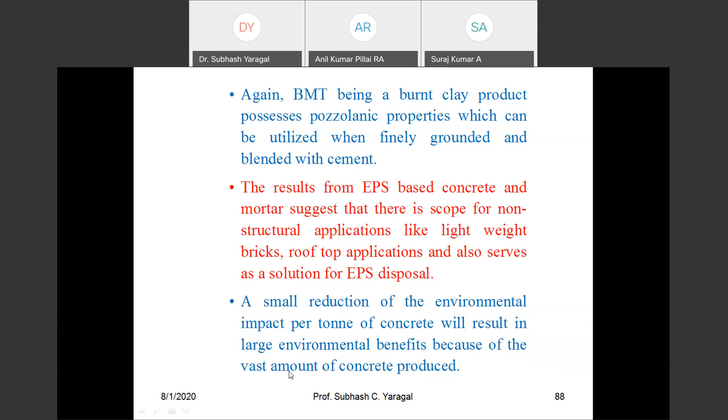So my last remark: a small reduction of the environmental impact per ton of concrete will result in large environmental benefits because of the vast amount of concrete that we are producing today.

So some of our other related studies I am highlighting. We have done durability studies on ferrochrome slag, a product from the chromium industry. So we use ferrochrome slag as coarse aggregate in sustainable alkali-activated slag or fly ash based concretes.

We also used ferrochrome ash as a substitute to OPC. Other studies include the potential use of mine tailings, that is, iron ore tailings and fly ash in concrete. Then in 2017, we went ahead to do durability studies on concrete with partial replacement of cement and fine aggregates by both fly ash and iron ore tailing material.

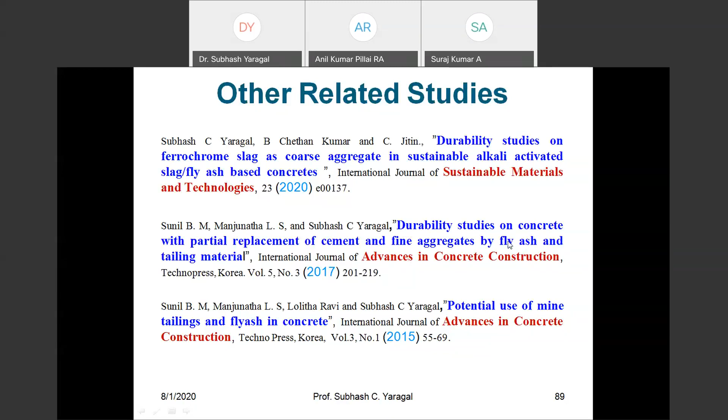So I'm coming to my last 2-3 slides, my closing remarks on how the civil engineering fraternity should contribute. The cement and concrete industry can contribute to reduction of CO2 emissions. You address the problem of global warming, you address the problem of global climate change, and then address sustainability.

Use design mixes against nominal mixes. We are all familiar with this. We must go for right concrete mix design so you save on the costs of concrete ingredients. Use as less Portland cement as possible, use as more cementing materials, and consume less unit water by going for water reducers and super plasticizers.

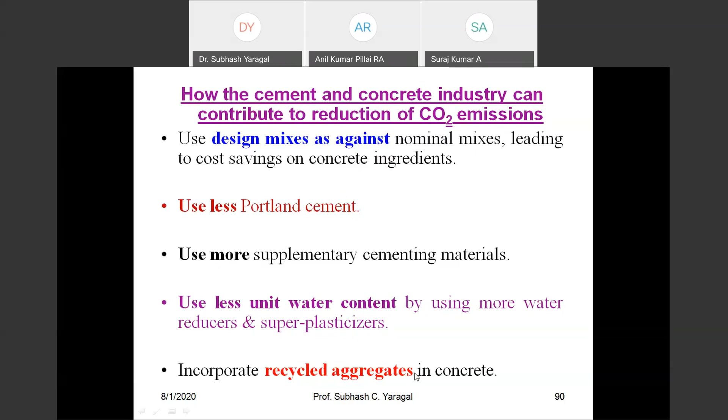Incorporate recycled aggregates in concrete. Use stainless steel reinforcement for important structures in critical parts so that you make them more durable, only for special applications, special projects.

Where possible, specify strength acceptance criteria based on 2 months or 3 months instead of 28 days. Promote roller compacted concrete for pavers and gravity dams.

Use lightweight concrete wherever possible, and develop self-compacting concrete using large volumes of fly ash instead of large volumes of cement, and reduce viscosity enhancing chemicals.

Design for durability instead of strength. Our revised IS 456 has also given guidelines for concrete mix designs based on durability.

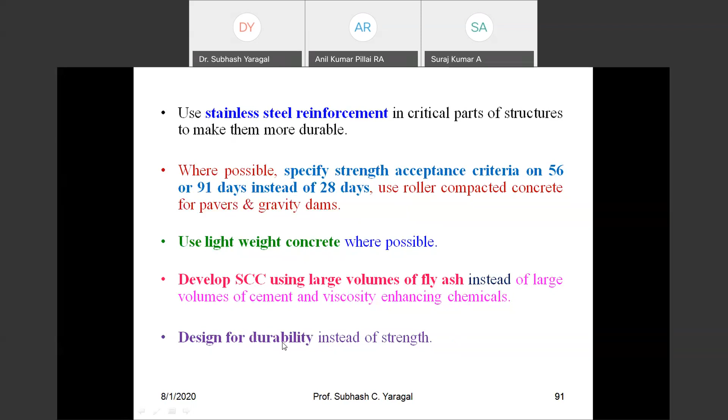Use pervious or porous concrete as much as possible. Advocate the use of geopolymer concrete or alkali-activated concretes.

We are doing that. Adopt alternatives to river sand. You have a lot of river sand substitutes. I talked about lateritic sand, copper slag, iron ore tailings, bottom ash. So all these materials that you are using on a large scale should preferably be characterized and then used.

Use as less water as possible and go for recycling of the water. So I'm done with that.

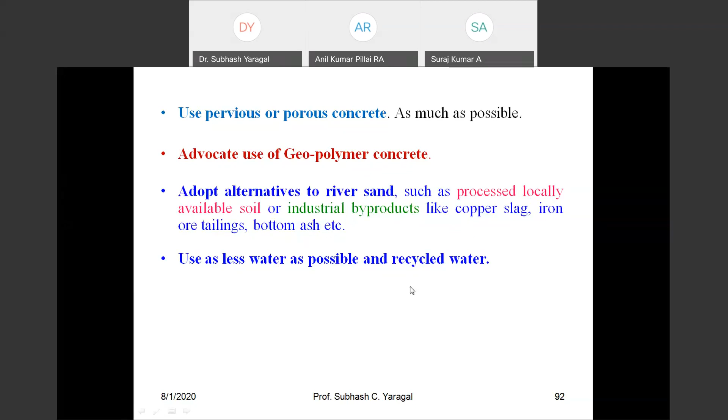So I close my presentation by sharing a prayer from Gitanjali. Rabindranath Tagore got a Nobel Prize for English Literature in the year 1913. So I've just taken an extract of this.

Where the mind is without fear and the head is held high — so if you are fearless, you can command respect. Where knowledge is free — no point having knowledge if you are not willing to share it, it is waste. Where the world has not been broken into fragments by narrow domestic walls.

So do not give importance to small little things and get fragmented.

Where the words come out from the depth of truth, where tireless striving stretches its arms towards perfection, where the clear stream of reason has not lost its way into the dreary desert sand of dead habit. So we must know where we are going, what is our vision. Where the mind is led forward by thee into ever widening thought and action, into that heaven of freedom, my Father, let my country awake.